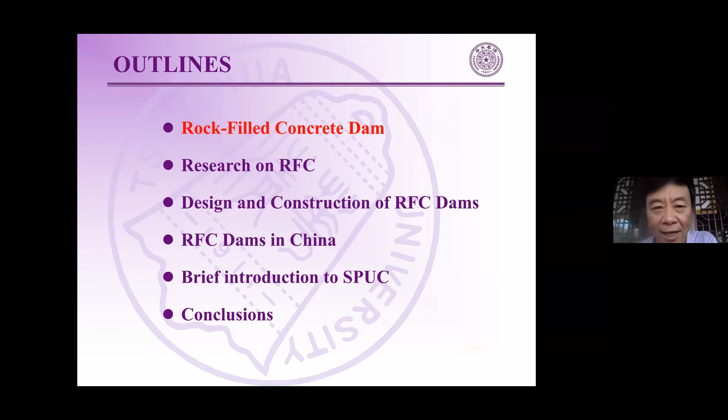As you know, when we build a reservoir we usually have mainly two types of dams: one is embankment dam, and another is concrete dam. The concrete dam may be a masonry dam or other rigid dams. Usually embankment dam is cheap because the construction material is cheap. Another advantage of embankment dam is it can be constructed on any kind of foundation, not only rock foundation, but also sand and gravel or other very poor foundation. So the embankment dam can be used at every dam site, but it has one very important disadvantage: when there is flood overtopping, the embankment dam will collapse.

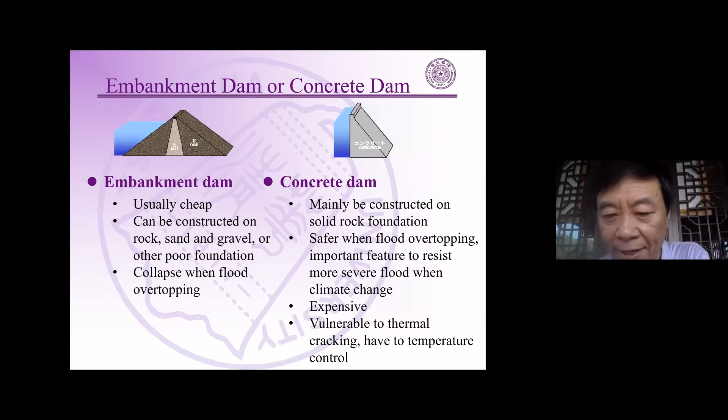In the new era of climate change there are more and more severe floods, so the risk of collapse for embankment dams is increasing. So an important feature of the concrete dam is it's much safer when flood overtopping occurs. Of course the concrete dam is usually expensive, and another limitation is it's mainly constructed on solid rock foundation only. And for a concrete dam, the main risk of failure is it's vulnerable to thermal cracking, so we have to do temperature control.

The main type of concrete dam is the gravity dam. If we build a concrete dam, we have to resist the pressure by the water in the reservoir, and by the gravity dam we have enough self weight, so due to the self weight we get resistance from the foundation to resist the water pressure acting on the gravity dam. So we call it a gravity dam.

Another important concrete dam is the arch dam. It's usually arched, a shell structure. When water pressure acts on the dam, it transfers the action of the horizontal water pressure into the abutment via the arch, the horizontal arch. So we call it an arch dam.

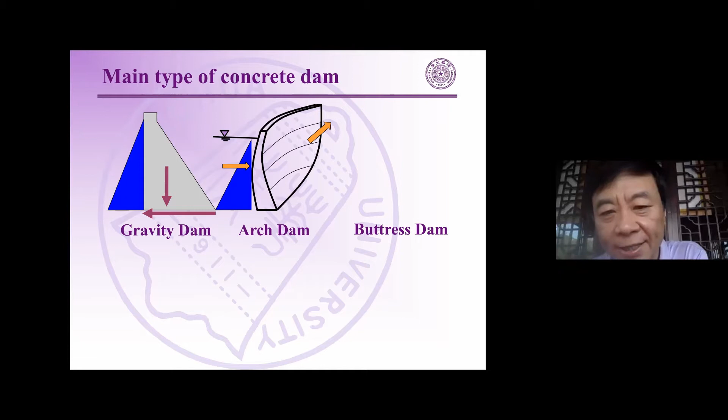Another important concrete dam is the buttress dam. There are many types of buttress dam, but usually it's just like a bridge. For a bridge we have many piers, and the weight of transportation transfers the load into the foundation via the piers. For the buttress dam, the horizontal water pressure is resisted by the arch or other structure into the buttresses, and we get a buttress dam.

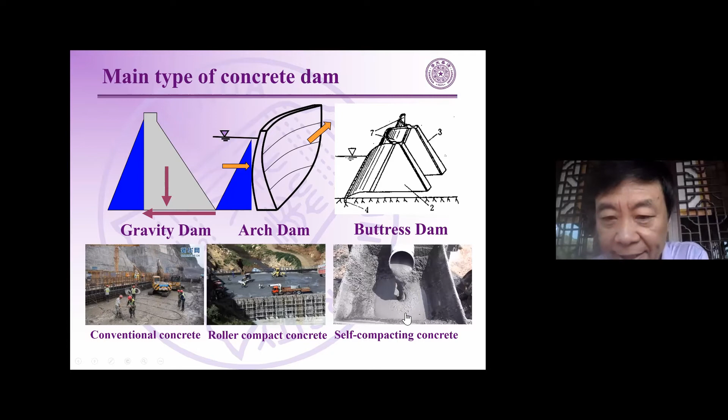And another new material we call self-compacting concrete. You can see this kind of concrete can very easily flow and be made without any vibrating or roller compacting. The self-compacting concrete can be self-compacting without any vibration or roller compacting.

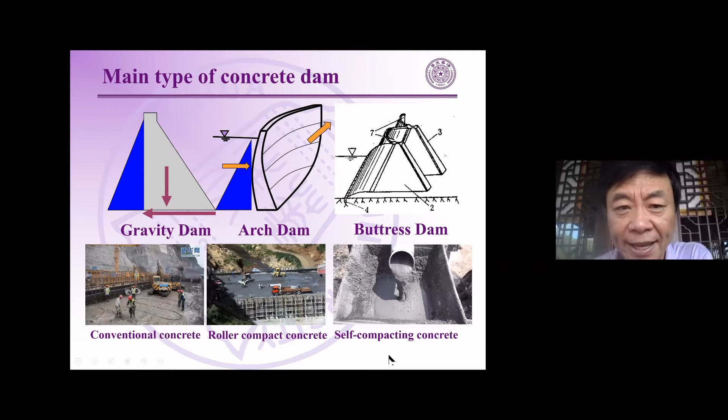In this case, at first we discuss thermal cracking. Why does concrete have to face thermal cracking? As we can see, in the concrete there is a lot of cement. The cement hydration reaction will generate a lot of hydration heat. This hydration reaction gives the concrete strength, but it will also induce some thermal stress.

Usually for concrete, especially massive concrete like in a concrete dam, the cracking resistance and the hydration heat make a balance. If the thermal stress from the hydration heat is lower than the cracking resistance, then temperature cracking will be prevented. But unfortunately, the hydration heat in massive concrete also always induces higher thermal stress.

So we have to use a temperature control method with cooling pipes. Like this, you have to embed cooling pipes in the concrete and let cooling water pass through them to let the hydration heat dissipate from the massive concrete itself. This cooling pipe method requires a lot of temperature control, and it's very complex.

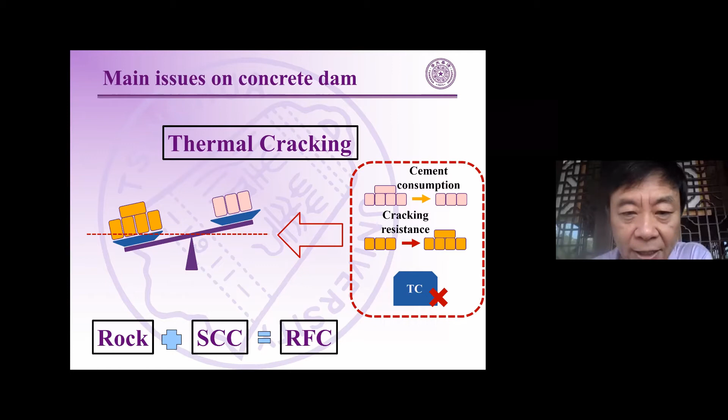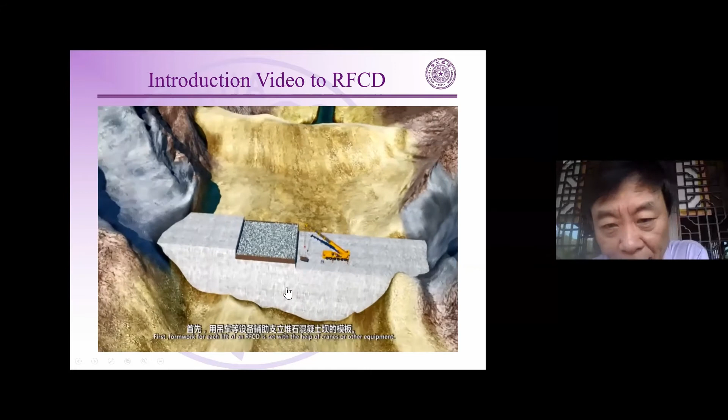Now we can show a very simple video of the process of how to build a dam with rock-filled concrete. At first, we transport some large rocks. The grain size of these rocks is usually greater than 300 millimeters, and the height of each lift is usually from 1 meter to 3 meters.

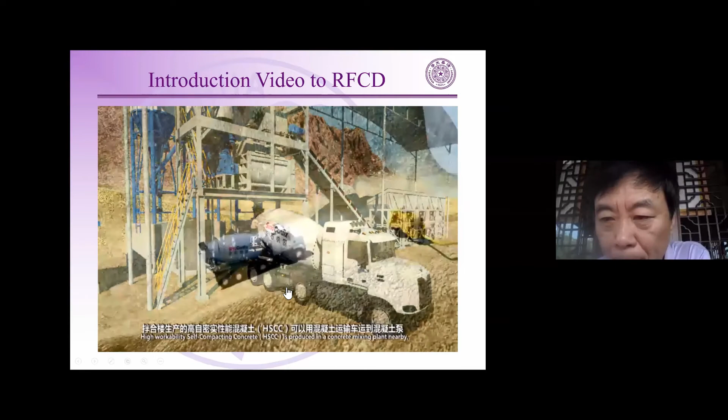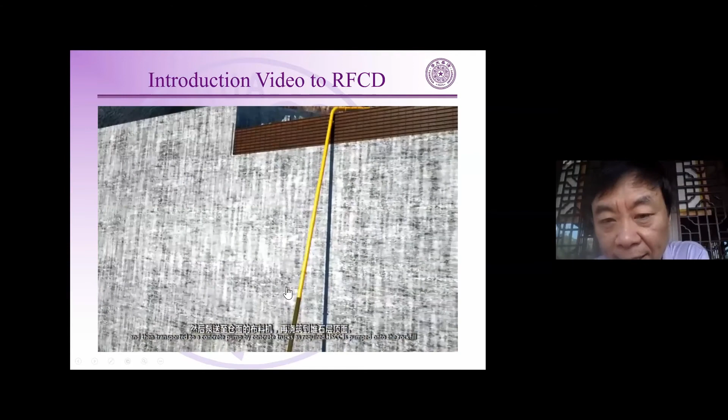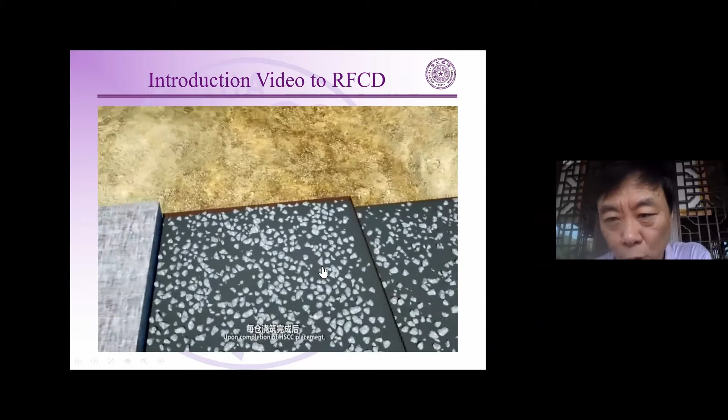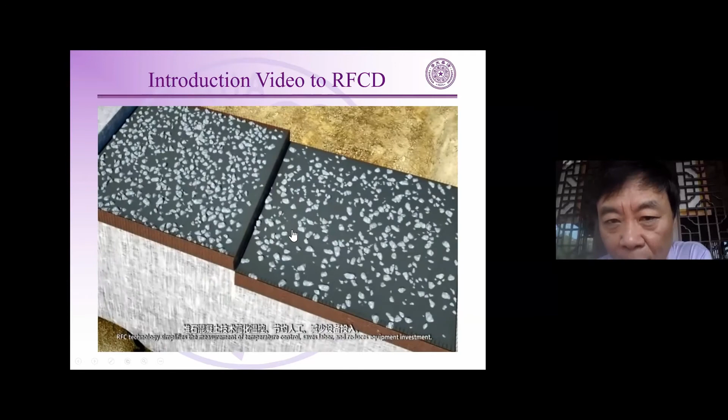Then we mix some very high performance self-compacting concrete. This self-compacting concrete can just be placed on top of these rocks, and then it will fill into the voids between the large rocks, giving us a solid concrete. You can see on the lift surface we let some of the rock stay above the surface of the self-compacting concrete, so the two lifts, upper and lower, can be bonded to each other.

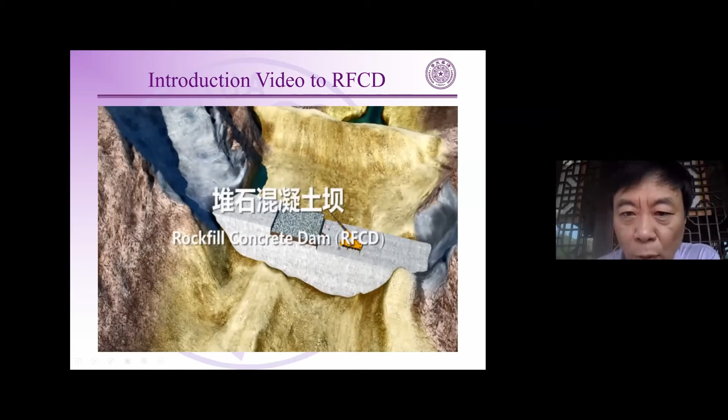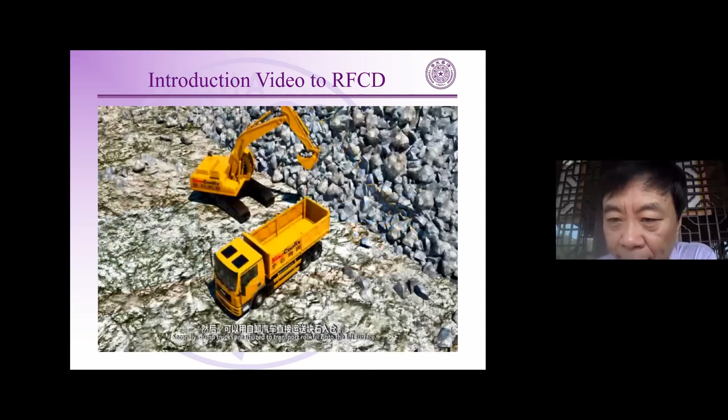With these exposed rocks, and because they use so much rock, very little cement is used in this new technology. Due to the very low cement consumption, the thermal stress in this concrete is much lower, and it can be built without any temperature control measures.

You can see this is the volumetric ratio of materials in the rock-filled concrete. In volume, about 55% is the large rocks, the grains with grain size larger than 300 millimeters. The maximum grain size of the rocks we usually use in the dam may be 800 millimeters or even 1 meter, even 2 meters if you can transport it.

And another 45% in volume is filled by the self-compacting concrete. Within the self-compacting concrete, we have 27% aggregate, with a maximum grain size of 20 millimeters. And of course we have about 9% water, and usually mineral admixtures such as fly ash or sand powder at 6%, and only 3% cement.

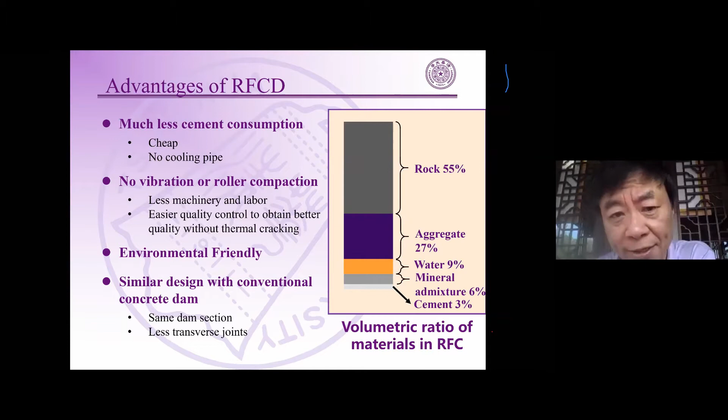Of course we had to conduct many researches on RFC. At first we did collaboration research with Northwestern University in the USA to study the inferior limit of the filling performance of self-compacting concrete.

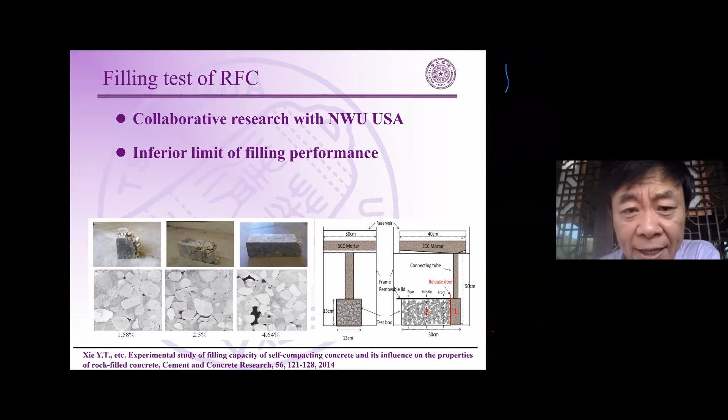We can see the inferior behavior of the concrete if the performance is below the inferior limit of self-compacting concrete. We developed methods to study the filling performance of self-compacting concrete in filling the voids between rocks.

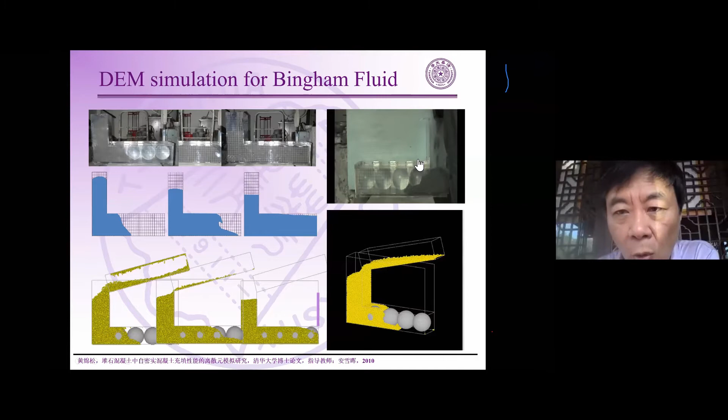We developed numerical methods to simulate the experiment results. We also developed a state-of-the-art simulation model called the Lattice-Boltzmann method, hybridized with the distinct element method.

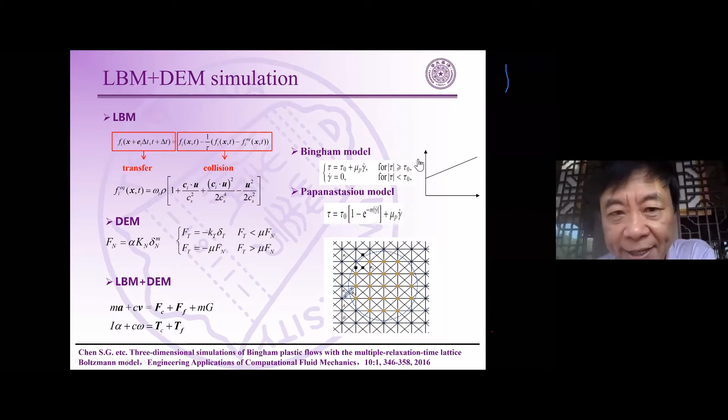We use the distinct element method to simulate the aggregates in self-compacting concrete, and we use the LBM, the Lattice-Boltzmann method, to simulate the mortar of the self-compacting concrete.

In this simulation result, the small circular particles denote the aggregates in self-compacting concrete, and the large black one simulates large rocks. We can see the self-compacting concrete can fill the voids between the large rocks.

If we define a blocking factor, when the gap between large rocks is 2 times the grain size of the aggregates in self-compacting concrete, the risk of blocking is much higher. So we require the net width of rock voids to be at least 2 times the aggregate size. Due to this, we define a very conservative limitation that the grain size of the large rocks should be larger than 300 millimeters.

This is 15 times the aggregate grain size in HSCC, the high performance self-compacting concrete, where aggregates are only 20 millimeters. So this 15 times ratio will ensure the filling performance of the self-compacting concrete.

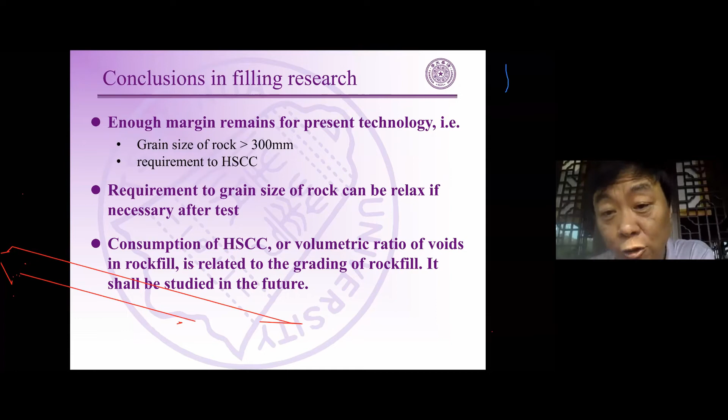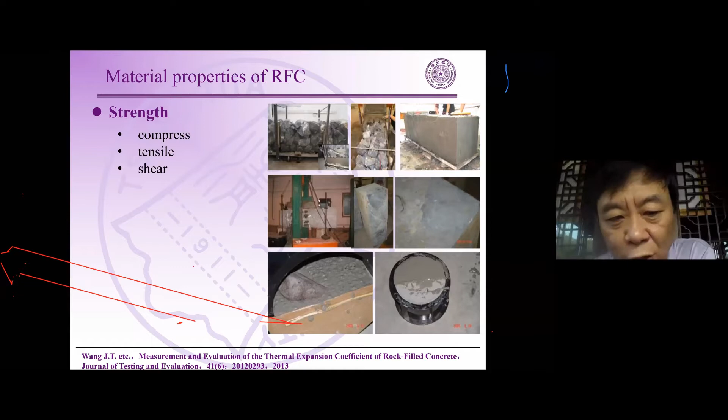We also tested many material properties of rock-fill concrete, such as strength. We conducted compressive, tensile and shear strength tests of the concrete. We also tested the elastic modulus, Poisson's ratio, the seepage resistance of rock-fill concrete, and the freeze-thaw resistance of self-compacting concrete.

We also tested the hydration thermal rise of RFC, and studied the microstructure and properties of the interface between the large rocks and self-compacting concrete, which we call the ITZ, using SEM. We concluded that the self-compacting type has better performance than the conventional vibration type.

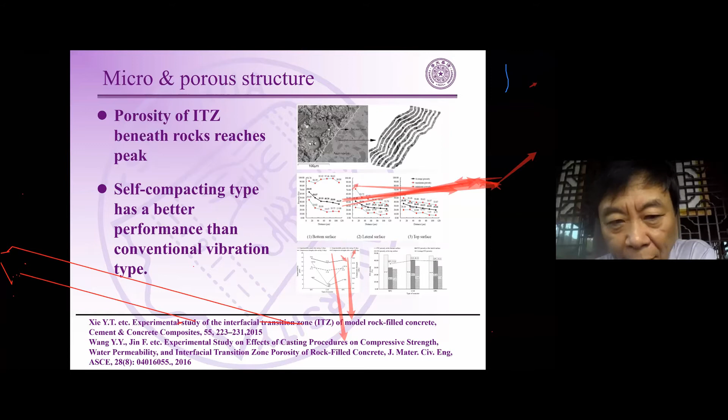This study encouraged us to build rock-fill concrete dams at very high heights, since this type of concrete gives very good compacting performance.

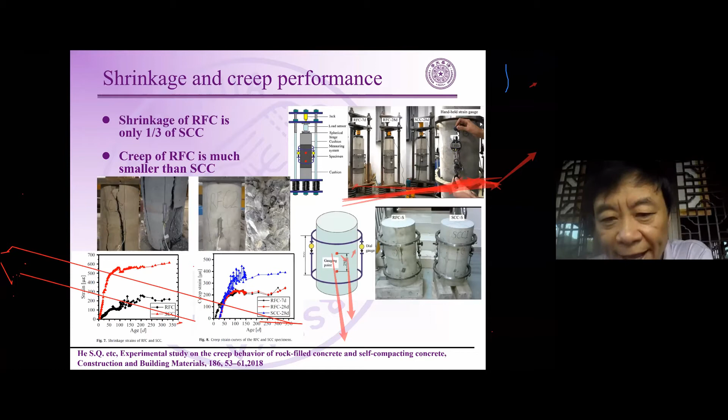We also tested shrinkage and creep. Due to the large proportion of rocks, rock-fill concrete has smaller shrinkage and creep. We also studied the fracture toughness of the concrete.

We concluded that the fracture resistance of rock-fill concrete is much higher than conventional concrete, because the large rocks prevent crack propagation. Cracking may initiate similarly in the concrete, but micro-cracking in rock-fill concrete cannot propagate easily due to the limitation imposed by the large rocks.

So we can conclude that the density, strength, seepage resistance, freeze-thaw, and thermal physical properties are very similar to those of conventional concrete.

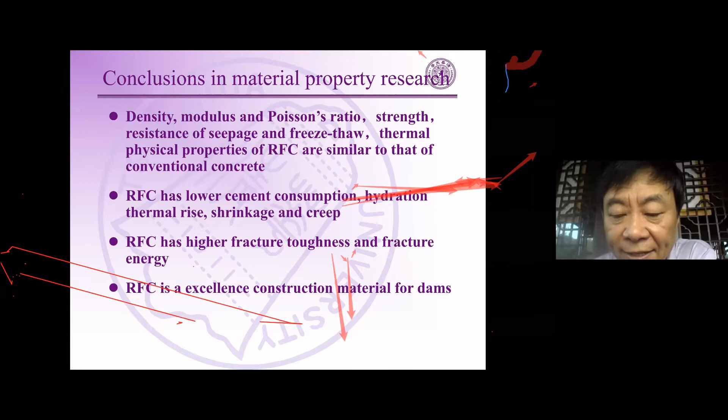This is rock-fill concrete. It has lower cement consumption, and thus a lower hydration thermal rise, shrinkage and creep. Rock-fill concrete has higher fracture toughness and fracture energy, so it is an excellent construction material for dams.

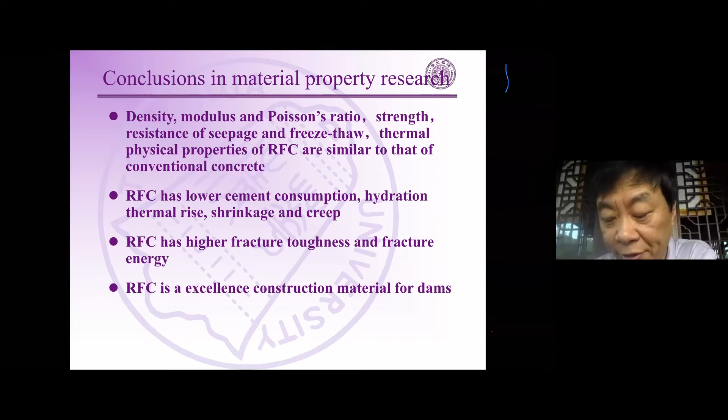We can introduce some design and construction details of the RFC dams to our Indonesian colleagues. We can use rock-fill concrete to build gravity dams and arch dams. In principle we could also build a buttress dam, but until now in China we only use rock-fill concrete to build gravity dams and arch dams.

This is the zoning of a gravity dam or arch dam built with rock-fill concrete. Usually at the upstream we set an impervious zone, with thickness ranging from 300 millimeters to 600 millimeters, or usually about half a meter.

This impervious zone is built only with self-compacting concrete, meaning there are no rocks in this zone. Also, at the bottom of the dam body, we set a conventional concrete cushion.

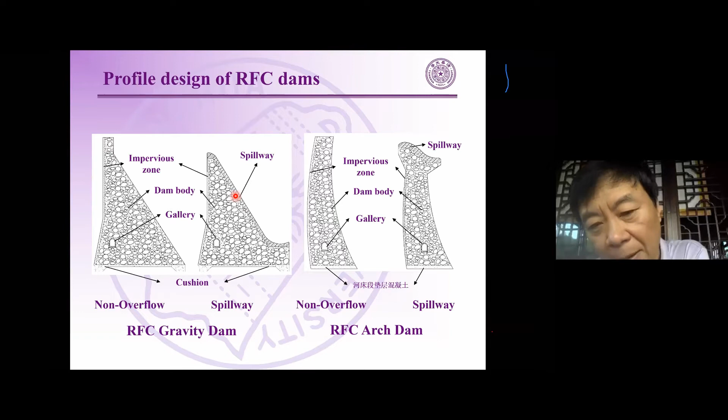This is a non-overflow section of the gravity dam, and this is a spillway. At the spillway, we use conventional concrete because it is easier to build in these small regions. Most importantly, the concrete for the spillway must have erosion resistance, and for that the better choice is conventional concrete.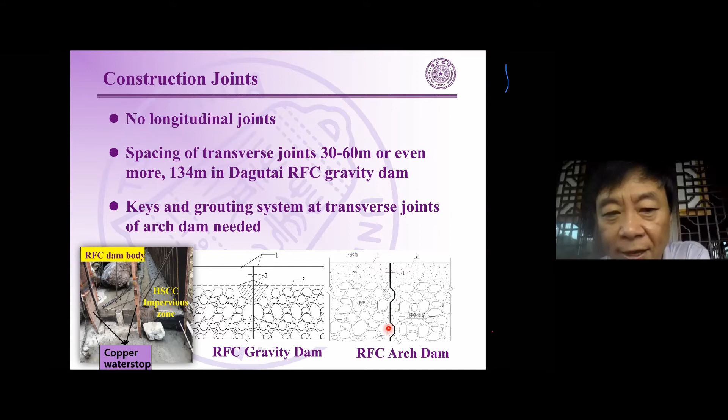In the dam body, we use rocks, but the self-compacting concrete can be cast simultaneously. If you build an RFC arch dam, you can use keys, and you can also set up a grouting system at the transverse joints for arch dams.

This shows details of the impervious zone. You can see there are some rocks, and this is the impervious zone. Of course, for the impervious zone, there is only high performance self-compacting concrete.

We can also use galleries. Around the galleries you have to set some reinforcement, and if you have reinforcement, you can set a void. This can be cast simultaneously, or integrally, using self-compacting concrete. It's similar to the impervious zone: you place reinforcement, and in this area there are no rocks. The rocks, the voids, and the reinforcement can all be cast with high performance self-compacting concrete at the same time.

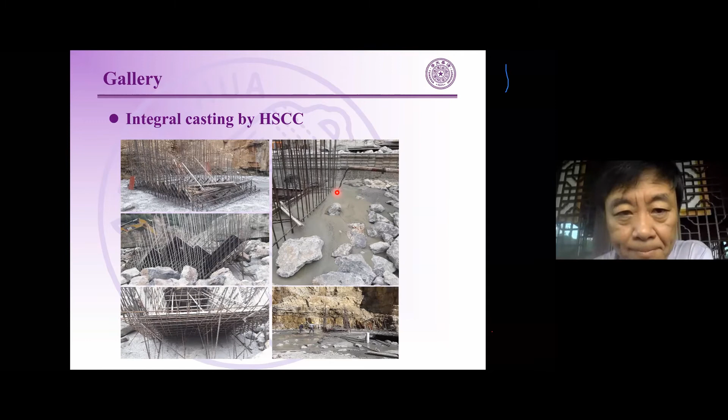This shows details of the construction process. First, from the quarry, there is a selection process, mainly selecting the right rock sizes, usually just using an excavator. The excavator can perform the rock selection.

If there are many small rocks, you have to use some real screening to help with rock selection, but this is a rare case. And if the rock is dirty, covered by mud or clay, then you can use rinsing or water washing to clean the rocks, because the large rocks have to be clean.

Then you transport the rocks to the lift, and use the excavator to help with rock leveling. The leveling maintains a similar thickness, with the height of the lift about 1.5 to 3 meters. Of course, we can also install some formwork.

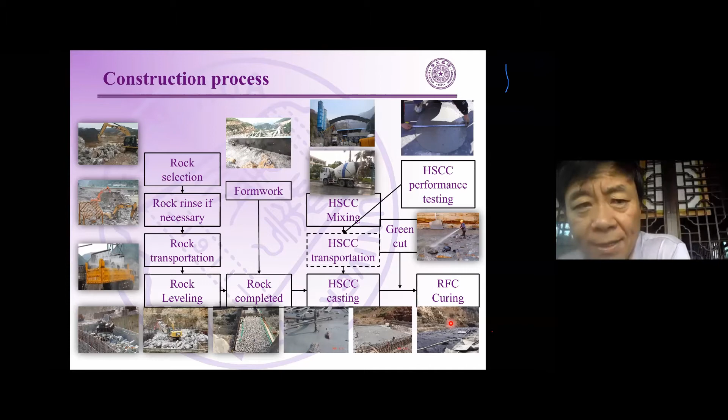All the high performance self-compacting concrete is mixed in the mixing plant, and all the concrete is just transported by a concrete pump through the pump line into the lift. So it's just by a pump from the mixing plant into the dam lift.

So it's very easy to build a concrete dam. And of course, we have some criteria for the large rocks. Usually, the large rocks need to be hard and fresh.

What is hard? For a concrete dam with height lower than 100 meters high, the saturated compressive strength of the rocks needs to be larger than 30 to 40 megapascal. This is very easy to meet for usual rocks, and the grain size will be over 300 millimeters, and the surface mud content must be lower than 0.2 to 0.5 percent. So this is the requirements or criteria for the large rocks.

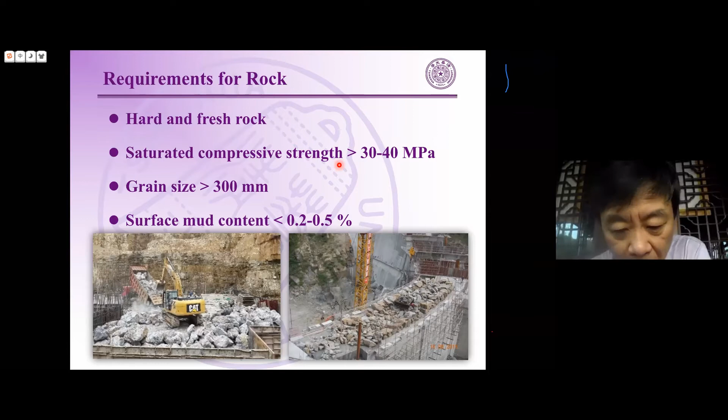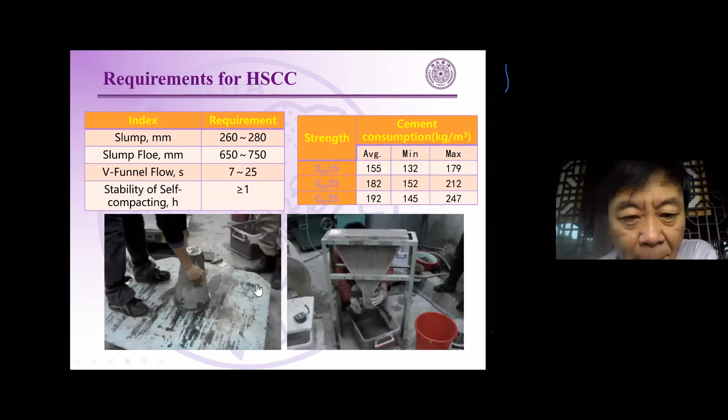This is the requirements for the self-compacting concrete. This is a slump flow test, and this is the funnel flow. We set up index requirements for the slump flow and the funnel flow, and we also define a stability for the self-compacting concrete. That means in 1 hour, the self-compacting performance of the concrete must meet requirements like that. It's not only in newly fresh concrete, you have to test it in 1 hour.

We can also define the cement consumption per unit of the self-compacting concrete. For example, for 90 days age, at 15 megapascal compressive strength, the minimum cement dosage is only 132. That's because in the rock-filled concrete, the self-compacting concrete is only 45%. So in the rock-filled concrete, the dosage or consumption of cement is only about 60 kilogram per cubic meter.

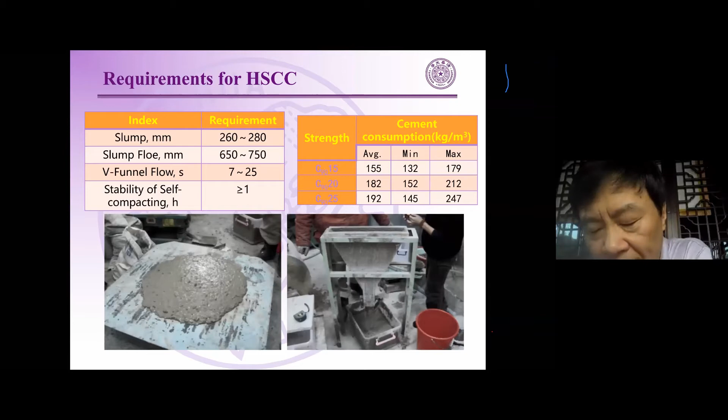So all these numbers will be multiplied by 0.45, because only 45% of the volume of the void is filled by the self-compacting concrete.

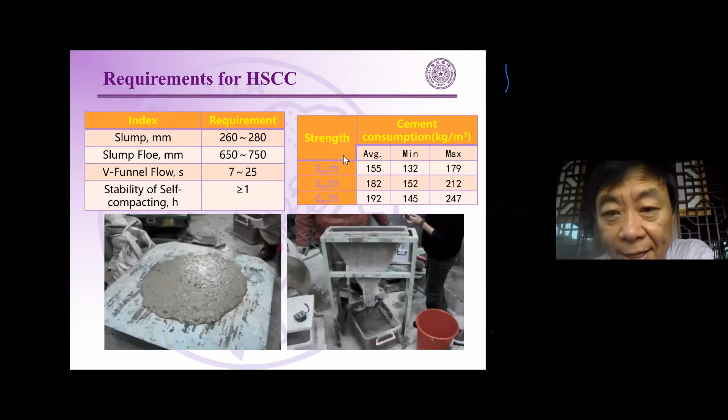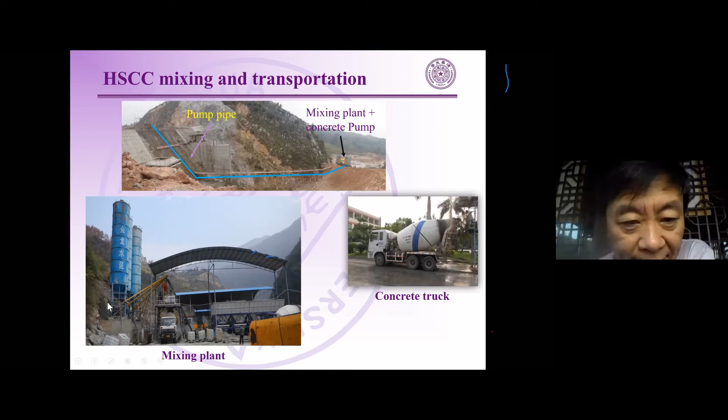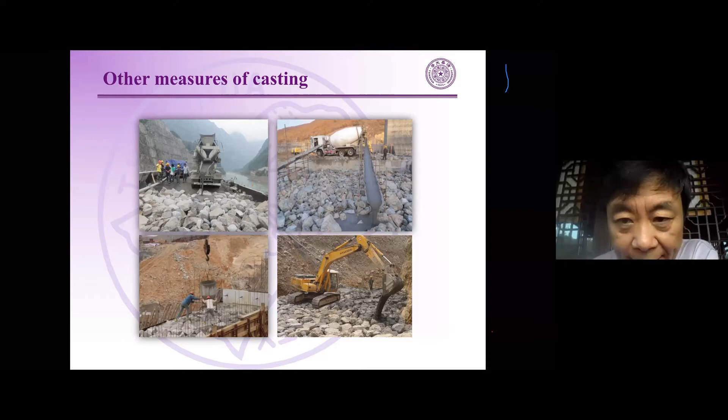This is how to place the self-compacting concrete into the rock fill by this method. We can use an S or return method from the upstream to downstream. And of course, we can also use many kinds of methods to build, not only by the concrete pump. For example, you can use the concrete truck, or some chute, or an excavator, or the cage. Any kind of measures you can use depends upon your prescribed conditions.

After the HSCC placement is completed, then you can use a green cut. You can see on the surface there are many rocks exposed in the lift surface, and you can use the green cut.

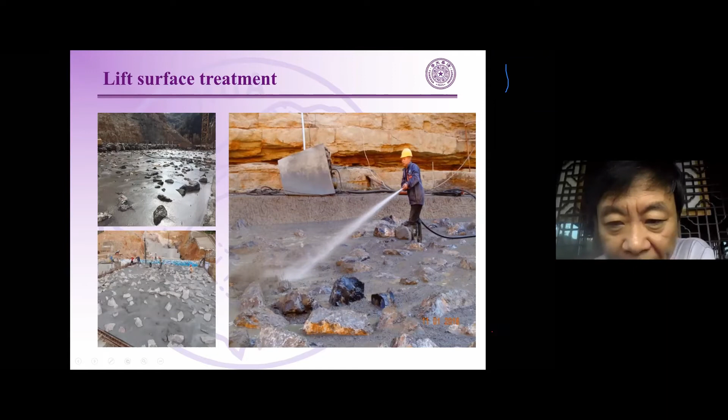We can show some RFC dams in China. In China, until the end of 2019, last year, we have completed 79 dams, and now we have 41 dams under construction. The highest rock-filled concrete gravity dam has reached 90 meters.

This is the highest RFC dam, in Yunnan province. We call it Songlin rock-filled concrete dam. This is the upstream, downstream, and this is the built structure, and this is the dam.

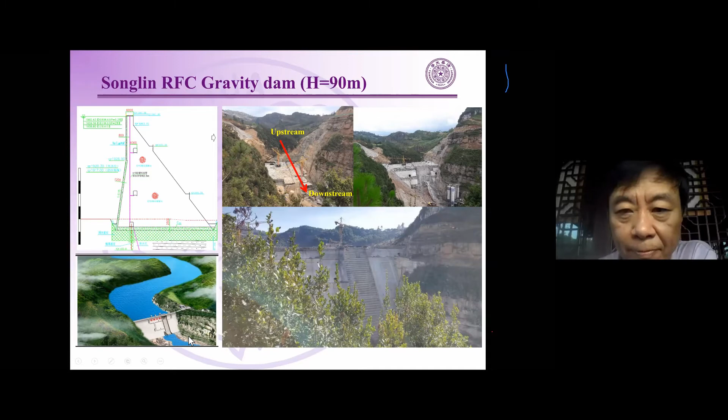With some other RFC dams, for example this is the Xiaowujiang Gravity Dam, and this is the Maopo dam. You can see many features here, this is a gallery. In this Maopo Gravity Dam, the height of the dam is 43 meters, and all the concrete was built in seven months, so it's built fast.

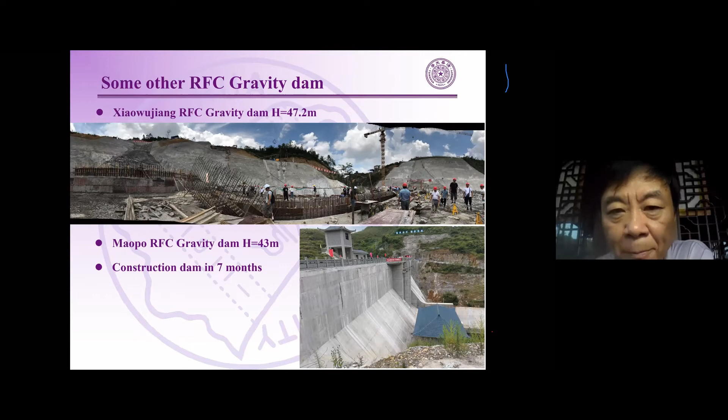So the endurance of this concrete is verified. And this is the highest arch dam, the Baijia double curvature arch dam.

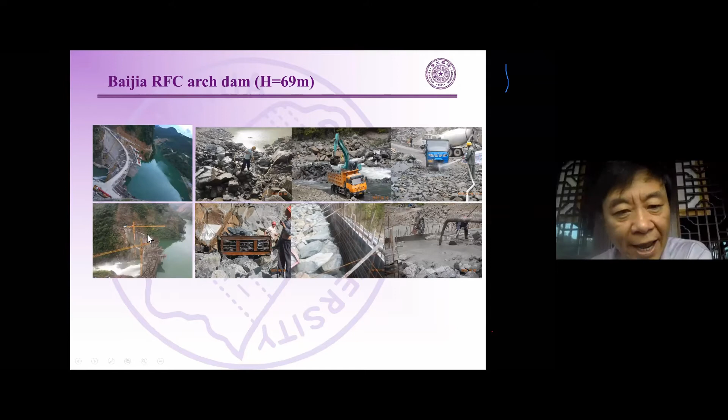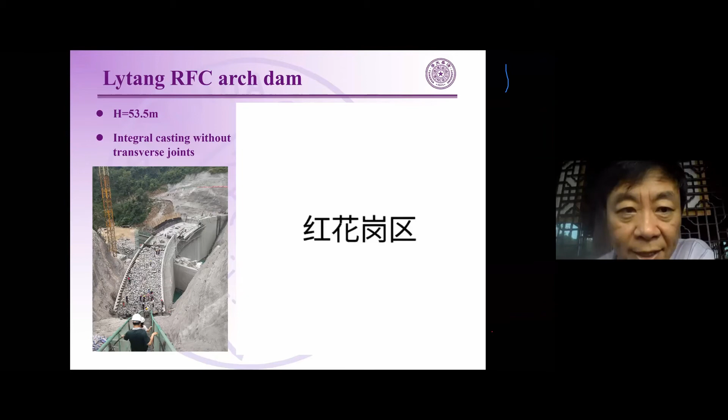We also built the Lytang RFC arch dam. This dam has no transverse joints, so the whole dam is integral casting. We can see some of this, and in this dam we use some precast concrete to build as formwork, and then the rocks.

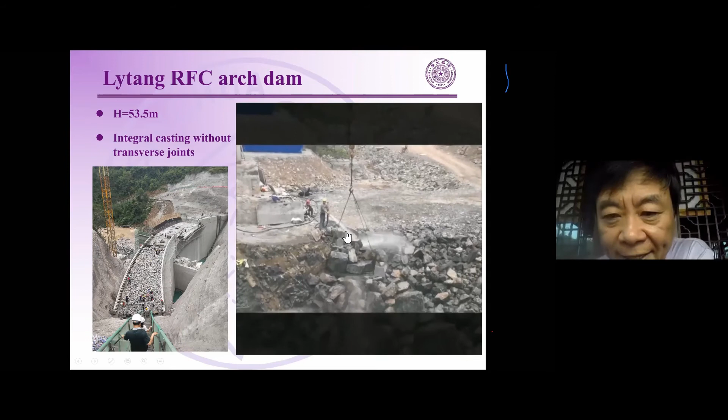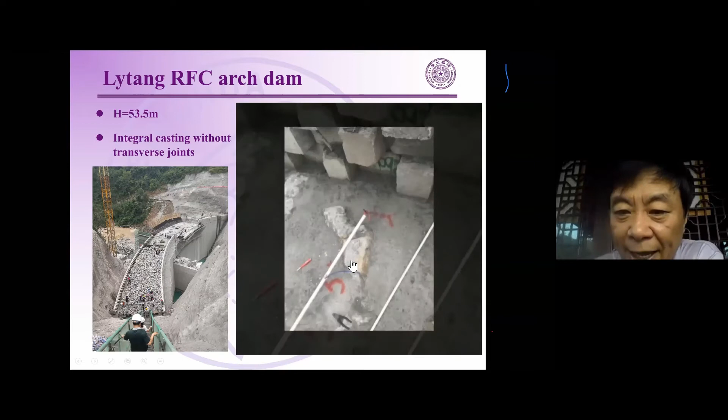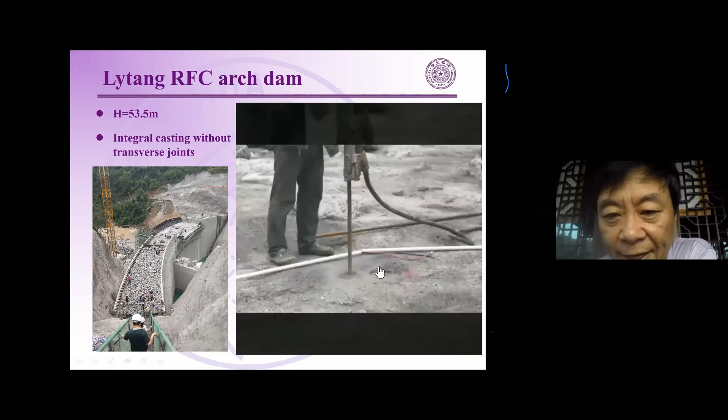The rocks were transported by the cage, and this is the rocks. This is a formwork made of precast concrete blocks, and this is the loading of the rocks and the lifting of the rocks. These are embedded parts for the monitoring items, monitoring the uplift pressure, monitoring the thermal temperature rise, things like that. And this is to monitor the formwork with the precast rocks, and this is to check and monitor the construction quality of the rockfill concrete.

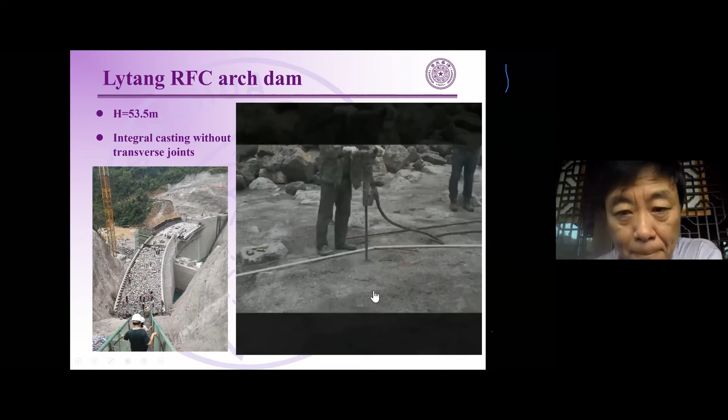And this is the Lytang arch dam completed.

Till now we have issued some standards. For example, this one in 2014 by the Ministry of Water Resources of the People's Republic of China, and this one by the National Administration for Energy, and we also have some English versions. So if you want to read some Chinese standards for rockfill concrete, you can buy it. We have English versions of these standards and codes. If you want to buy them, you can email me, and we can help you buy such Chinese standards to help you understand the criteria for rockfill concrete in China.

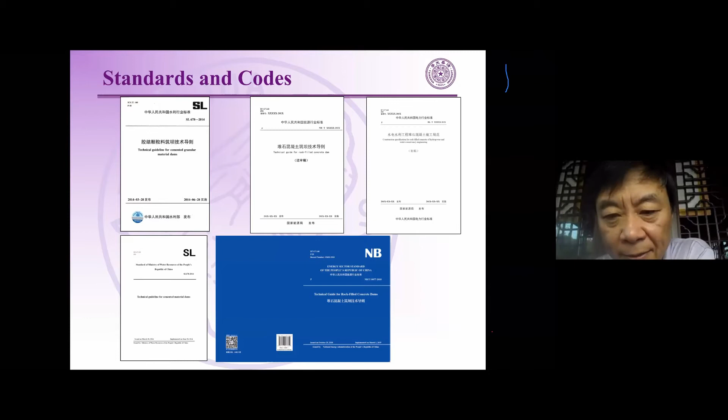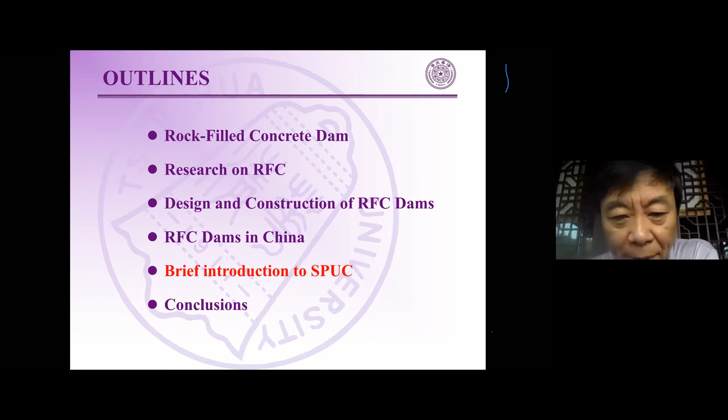We have a few minutes, so we will introduce some new technology for underwater concrete, which I think may be useful for colleagues in Indonesia. We can show some demo tests. This is ordinary mortar or concrete entering the water. You can see a lot of cement will enter the water and make it very dirty. If you use traditional non-dispersed underwater concrete with some agent added, you can see the water is much clearer.

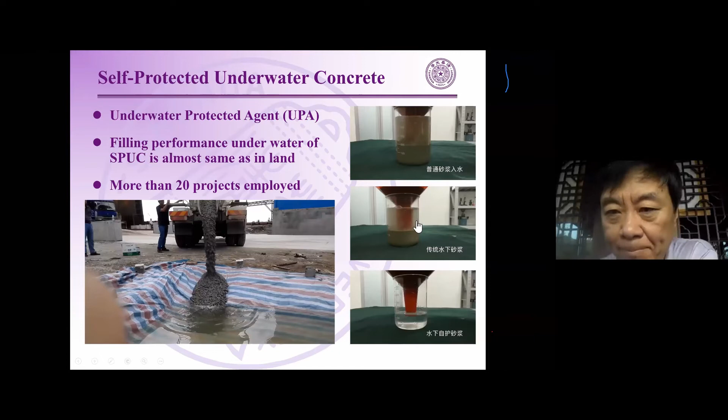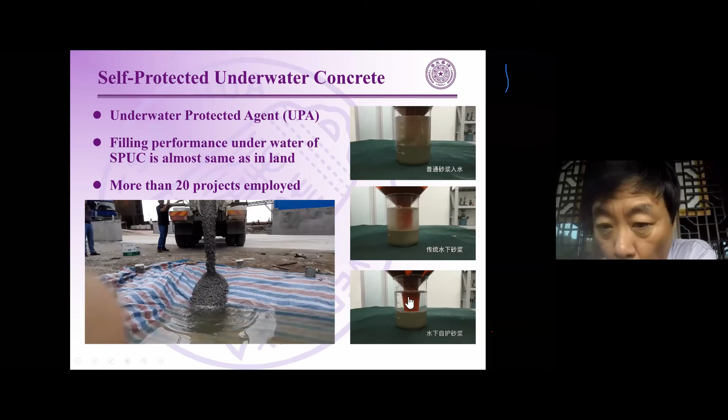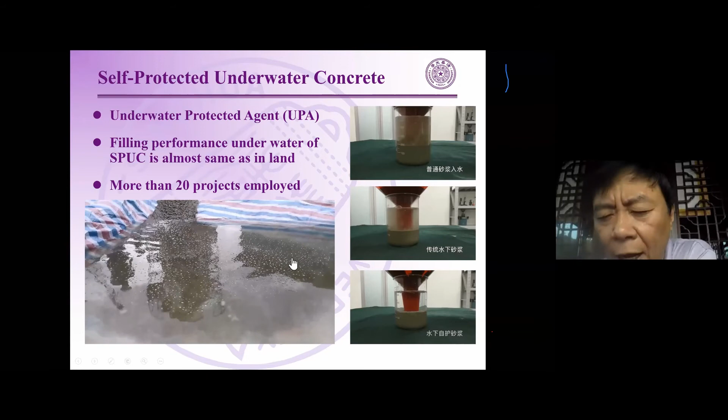This is the state of the practice of underwater concrete now. And this is a new method invented by my colleagues and myself, which we call self-protected underwater concrete. You can see the water stays clear during the concreting. This is a demo test. You can see this is water, and we can just pour it into the water. In this technology, the water is not plain water, it's a solution with our underwater protected agent, which we call UPA. We add some UPA into the water at a very low concentration, usually 100 ppm. Then we can pour the concrete into the water, almost the same as on land.

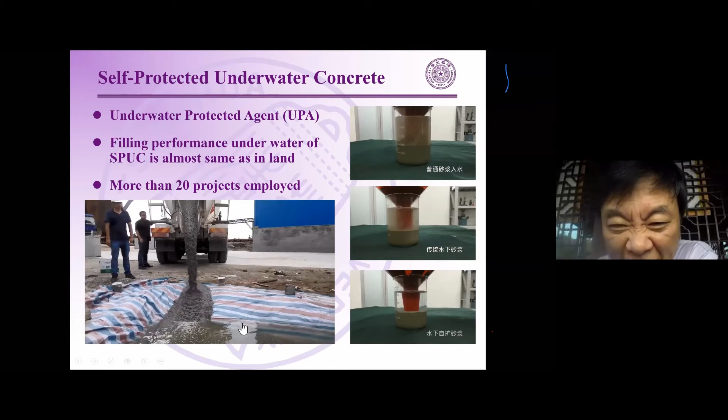So you can use self-protected concrete underwater, similar to on land. This is the project, the Long Bay 1 rehabilitation project. This is a spillway, but it was eroded by flood discharging, and this area will be eroded.

Because it's underwater, we use this method. This is self-compacting concrete, so due to the self-compacting property, it can just be placed into the water without any vibration or other measures. You can see the concrete being cast into the water. This is the formwork. Of course, the formwork underwater is installed by the diver. And when the concrete was placed underwater, you can see it turns out like ordinary concrete.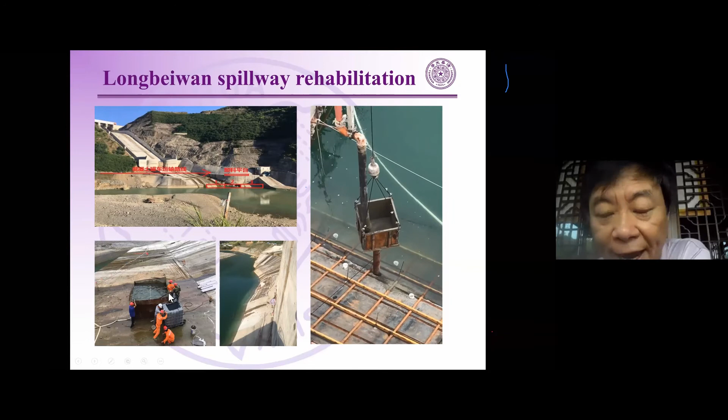Before this, we use the UPA underwater protection agent in the formwork. Then it's very easy to place underwater.

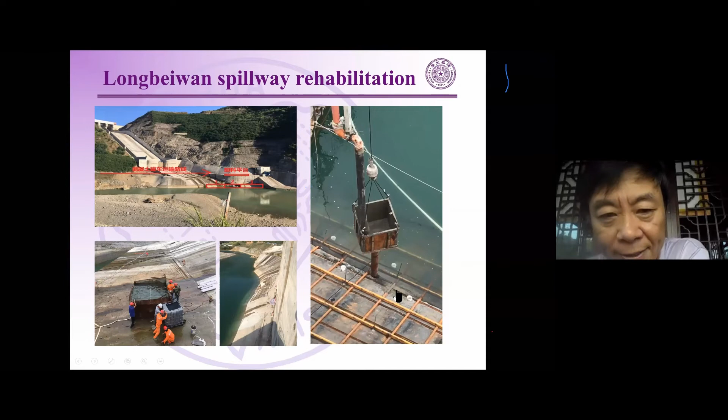So we have a conclusion that the rock-fill concrete technology can be used not only in gravity dams, but also in arch dams. The broad application prospects of rock-fill concrete are shown in practical engineering projects due to many advantages.

For example, the advantages include high quality. We have very good quality concrete, and it's economic - cheaper than conventional concrete and roller compacted concrete. In China, usually rock-fill concrete will be cheaper than roller compacted concrete by 10% to 20%, and 10% to 30% cheaper than conventional concrete dams.

By employing rock-fill concrete, we save labor and machinery, and we can achieve fast construction. Until now, the fastest construction in China was a concrete dam 58 meters high built in 4 months. All the concrete was built in 4 months - we can build a gravity dam whose height is 58 meters.

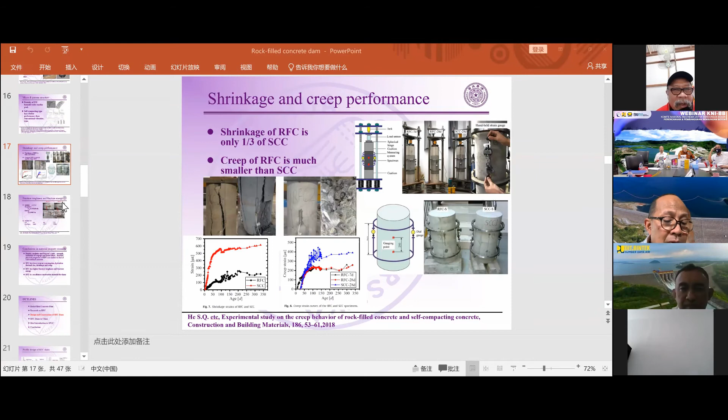I would like to ask you how to secure the impermeability of the upstream face against water in the reservoir. Can you show the slides first? The cross-section of the concrete dam with the upstream impermeable layer and the gallery, just before the construction joints. I think maybe around this one. Yes, exactly right.

So my question is, for concrete dams, we always have to pay attention to how permeable the upstream face is. In some cases, we can use different kinds of material for the impermeable layer, for example grout-enriched vibrating concrete, conventional vibrating concrete, or geomembrane. What is your guarantee that using self-compacting concrete, or even high-performance self-compacting concrete, the permeability will not create any problems for the impermeability issue on the upstream face?

That's the first question. The second question, still on the gallery - you know this gallery is sometimes useful either as an inspection gallery or a grouting gallery. In one of our concrete dams, there is a concern: inside this gallery, we experience water entering, not from the upstream face, but we found out that most likely the water is entering through the abutments, and this water entering the concrete materials creates so-called lime leaching.

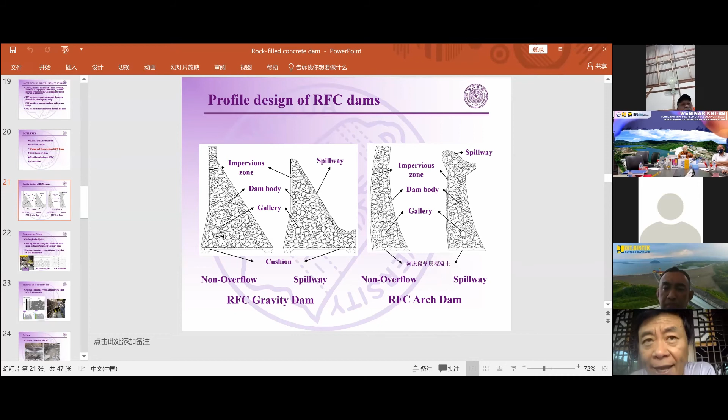So these galleries are not only for grouting the curtain, they're also used for inspection and for drainage. They're also used for monitoring. Usually in China the gravity dam will be monitored in the dam body - usually we should monitor the uplift. We set some instruments along the curtains, and the wire connects into the gallery, so we set monitoring instruments to monitor the seepage.

We usually monitor the uplift, and also monitor cracking or displacement along this interface. We also monitor the strain in important parts, for example with instruments like this. We also monitor the temperature of the concrete, and other instruments are installed at the crest of the dam. So in this dam we usually set an impervious zone just for conservation.

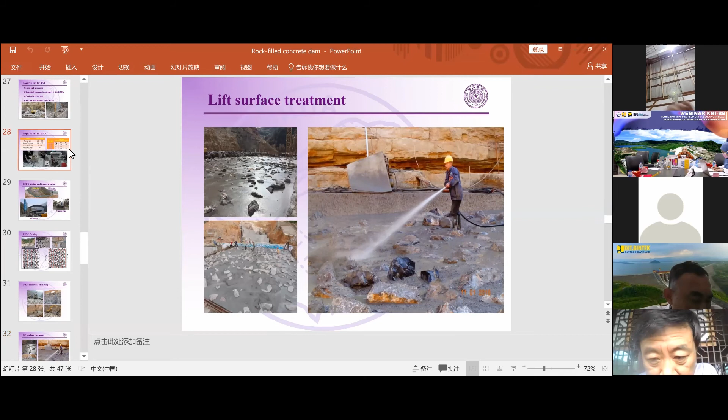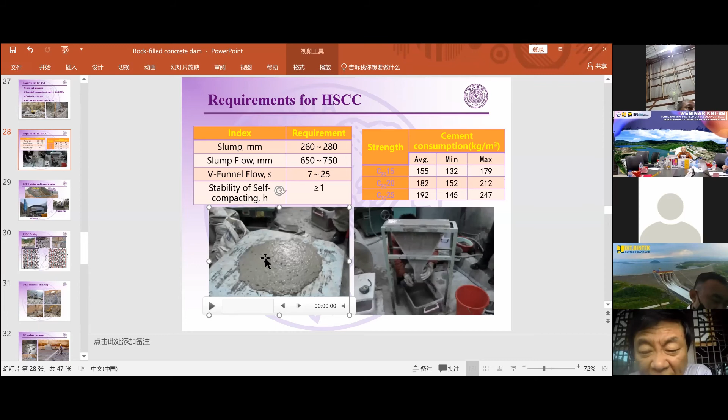Usually the slump for the conventional concrete is only 80 millimeters or 120, like that. And for self-compacting concrete it's 260 to 280—sorry, this is not slump, it's slump flow. Slump flow, because the slump is much higher, we use another index called slump flow. What is slump flow? It's the diameter of this spread—we measure the diameter from this to this and this to this. So the diameter of this slump spread will be 650 to 750, or so. So from the performance, the self-compacting concrete is much more flowable.

And actually, we also use the funnel flow test. You can see we test the time for all the concrete to flow out empty. This test indicates if the self-compacting concrete is too viscous or too less viscous—then the funnel flow time will not fall in the acceptable range. So this range indicates the viscosity of the self-compacting concrete is good, and this good viscosity ensures the segregation resistance performance. This is from the behavior of the concrete.

Another aspect is how we obtain that good workability. This is due to two reasons. One, we must use a very, very good superplasticizer. And second, in this concrete, the volume of coarse aggregate is smaller, so we use more sand, more mineral admixture, and more powders. So the dosage of the self-compacting concrete is different from the conventional concrete.

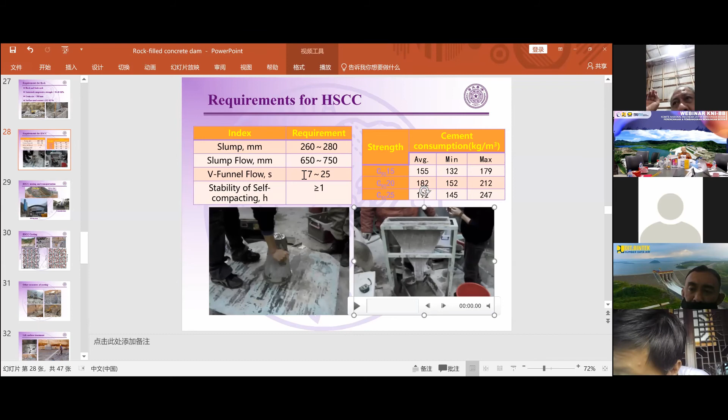Professor Jin? Sorry, yes, I can't hear the question.

Based on your experience, is there any concern about cracking due to concrete hydration? Till now, we've built more than 100 RFC dams. There is no thermal cracking, because there is very little cement, so very low temperature rising. Usually, without any temperature control elements, the thermal rise of the RFC in the dam is only 5 to 8, or up to 10 degrees Celsius. So the thermal rise is much lower than conventional concrete or roller compacted concrete. So without temperature control, there is no thermal cracking.

The next question is: how do you deal with potential honeycombing in the dam due to imperfect concrete compaction? Honeycomb - it's like the segregation of the concrete materials creating honeycomb, yes, because of concrete compaction.

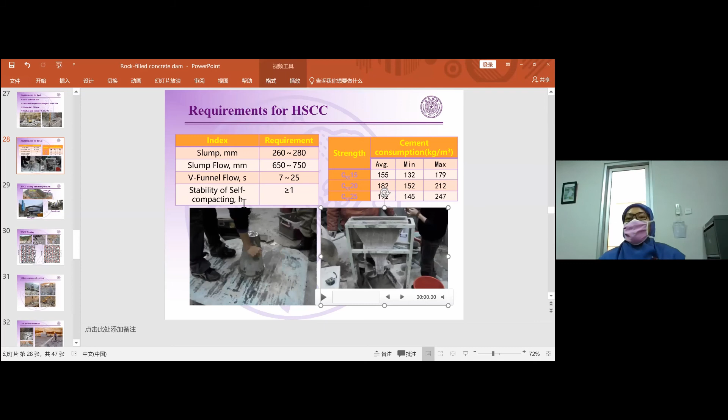What is the difference in CapEx cost for embankment and rock-filled concrete dam? The question asks about the difference between rock embankment dam and rock fill concrete dam. There are two questions: first, based on your experience, do you have data about the cost of rock fill concrete dam in comparison with the volume of the reservoir, maybe a certain million US dollars per cubic meter of reservoir volume. The other question relates to comparison of cost of construction for rock fill concrete dam against rock fill embankment dams.

In China, for RFC, the unit cost is about 300 RMB total. That is about $50 US per cubic meter of rock fill concrete.

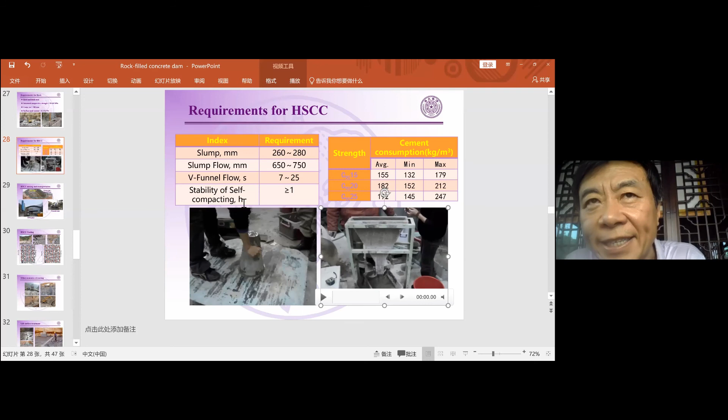But I don't know, because different countries have different costs for cement, labor, machinery, and other materials. In China, for conventional concrete, it's usually about 360 or 380 RMB, which is about 60 or 70 US dollars. So compared to conventional concrete, the cost of RFC is only about 80% of the cost of conventional concrete, usually like that. So this is about cost.

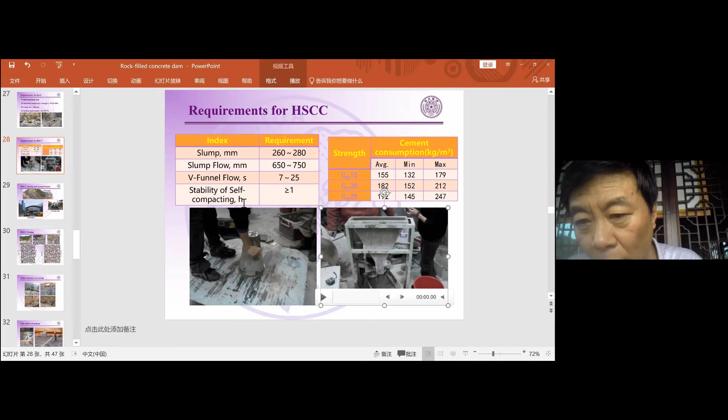Usually in China, the rock fill dam is cheapest because the cost of construction material is cheaper. But for a rock fill dam, you have to build a spillway, so if you consider the spillway together with the dam, maybe the concrete dam may be cheaper, or the rock fill dam may be cheaper. It must be determined through technical and economic comparison. In China, if the foundation is very poor, we usually build the rock fill dam. But if the foundation rock is very good, with a good solid rock foundation, we build a concrete dam. And when you build a concrete dam, the RFC dam is significantly more economic than a conventional concrete dam.